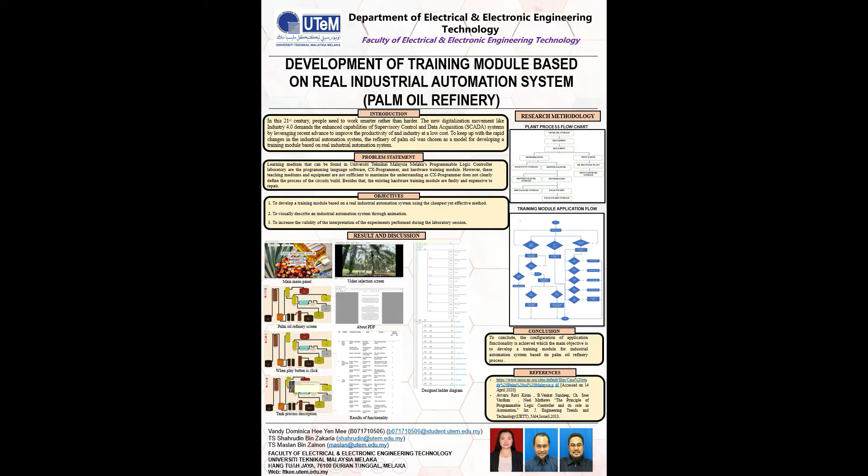According to Olivia McGarry, building courses can be tough to get right. Not only do they have to be educational, but they also have to be manageable for learners to achieve. One of the most effective ways to achieve this is by creating a course made up of training modules. The palm oil refining industries are among the world's leading manufacturing sectors, and palm oil has become an increasingly important vegetable oil in the world market.

Malaysia is currently the world's largest producer and exporter of crude palm oil. To keep up with the rapid changes in industrial automation systems, the palm oil refinery industry was chosen as the model for developing a training module based on a real industrial automation system.

Learning mediums found in University Technical Malaysia Melaka's Programmable Logic Controller Laboratory include programming language software, CX Programmer, and a hardware training module. However, these teaching mediums and equipment are not sufficient to maximize understanding, as CX Programmer does not clearly define the process of the circuits built. Besides that, the existing hardware training modules are faulty and expensive to repair.

Through this training module, a more flexible learning environment will be created for students, lecturers, and instructors. The purpose of this project is to develop a training module based on a real industrial automation system using the cheapest yet effective method. Besides that, the training module is developed to visually describe an industrial automation system.

Most industries nowadays control their plant using SCADA. This training module is believed to give users a surface introduction of what a SCADA may look like. Although this training module only represents the concept of SCADA, consideration has been taken, as it is built in a GUI form where users can control the application.

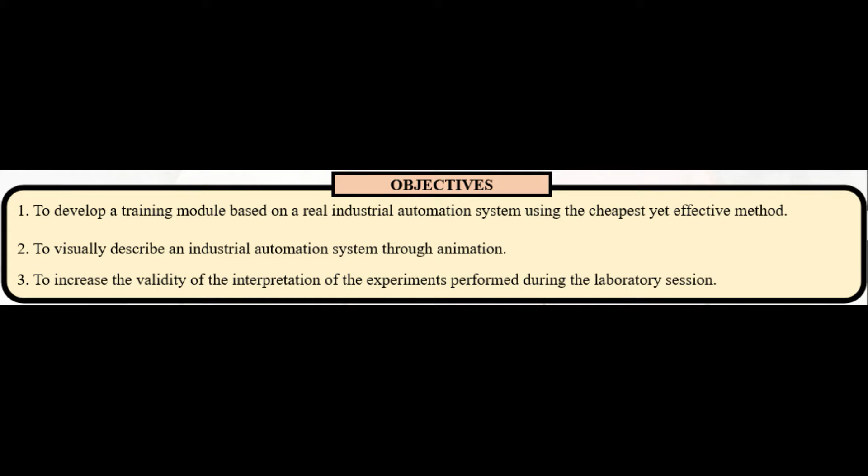Lastly, to increase the validity of the interpretation of experiments performed during laboratory sessions. With the help of this training module, I believe that the complexity of the process and visual aid diagrams will help students improve their critical thinking and problem-solving skills, and become more active in the learning process.

Research methodology: to complete this project, research took place in terms of planning, analyzation, simulation, and discussion processes. The ladder diagram was designed to consist of push buttons and timers as primary parts to ensure the system works corresponding to the industry's process. Visual Studio 2019, on the other hand, was used to build a controllable module consisting of diagrams such as pipes and tanks.

The programming language I used to build this project is Visual Basic, an event-driven programming language primarily used for application development. The designing and developing procedure uses easy drag and drop features. The module is programmed with objects that work with external objects such as images. Furthermore, it responds to mouse and keyboard events.

For example, when a specific action is taken by users, such as double-clicking on a button or image, it also works with text and graphics, allowing work with text effects, fonts, and colors. Visual Basic uses Basic C, C++, and Java programming languages.

The palm oil refinery layout in the training module application and ladder diagram are designed according to the palm oil refinery process flowchart. According to the flow shown, the training module starts when users click on the application, and the main menu panel is displayed along with buttons for palm oil refinery, related videos, and about.

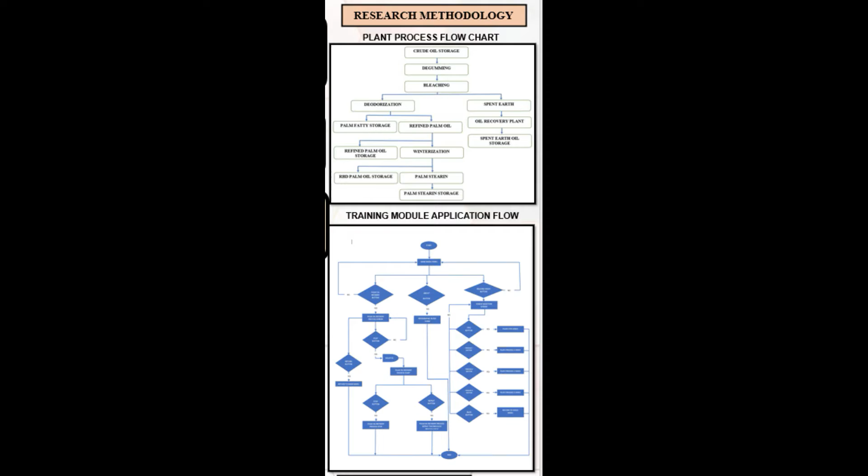Visual Studio 2019 is used to create the training module, and the programming language chosen specifically to build the GUI in a faster and easier way is Visual Basic.

The module is designed according to the process of the palm oil refinery. Some settings are included to make the module work as effectively as possible, such as start-stop control, repeat capability, real-time CX programmer simulation, and pop-up features to display process information upon double-clicking on anything.

This training module also includes video selection to help students understand more about the process, and also infographic explanation about the training module process in PDF form.

The codings are built step by step, starting from the main menu panel, the refinery screen for palm oil, related videos of plant process, and the buttons to the About information.

The control buttons are created through drag and drop features from the toolbox, and the IDE adds button 1 to the flow layout panel automatically. Finally, the code application will be debugged.

The images and videos shown in the application are compiled in a folder that is in the same folder as the application. The folder acts as a library for the application, and when it is called to execute, it displays the specific images or videos chosen by the users.

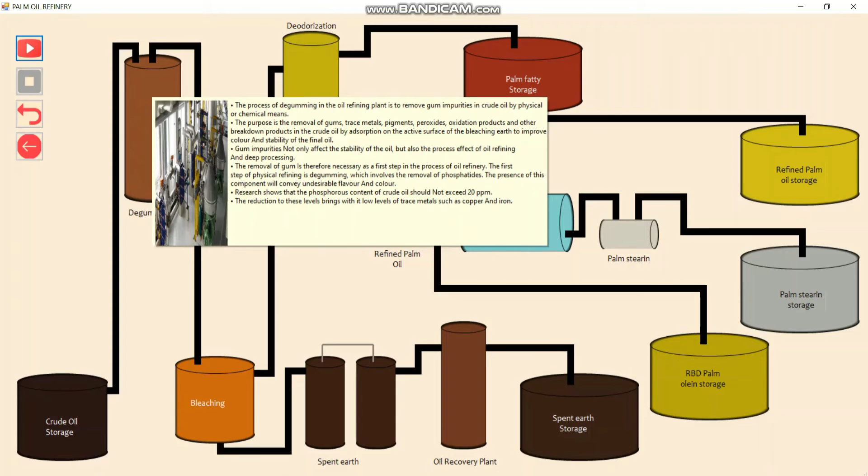Next, to exit the palm oil refinery layout, users just need to click the fourth button, or the last button.

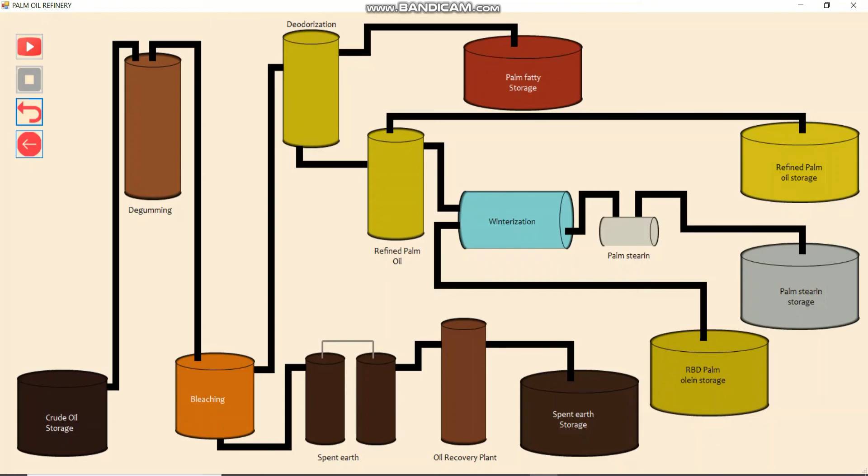Next, the Related Videos button. When the Related Videos button is clicked, the video selection panel will be displayed.

Brought to Southeast Asia from Africa a century ago, oil palms have thrived here. Today, this region generates 85 percent. How is palm oil produced? At the mill, the fresh fruit bunches are processed to separate them into functional components. Bunches arrive at the mill, are checked for quality, and selected into different grades. At the refinery, at the fractionation facility, the oil is separated into fractions.

Users are able to stop, pause, or control the volume of the videos. All of the related videos are obtained from YouTube.

Lastly is the About button. Upon clicking this function, a PDF infographic explanation regarding the training module plant process will be displayed. The PDF consists of 20 pages, including the pop-up information that can be obtained from the palm oil refinery layout.

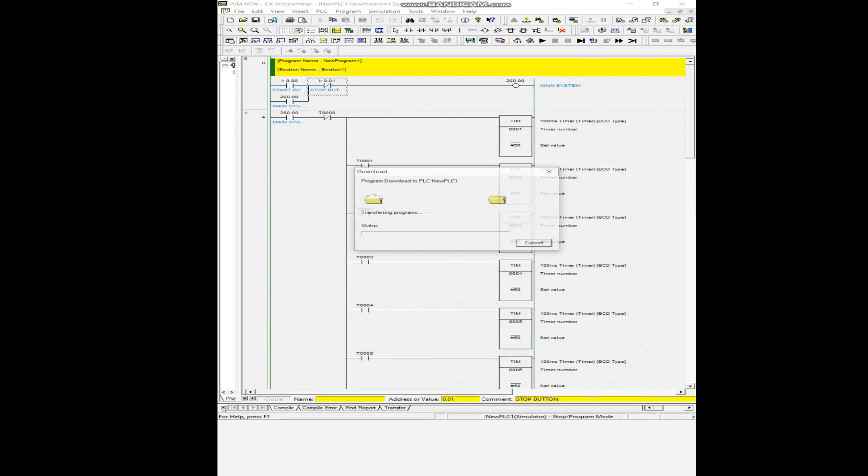Lastly is a simulation of the designed ladder diagram, designed according to the palm oil refinery process. The primary components of the ladder diagram are push buttons and timers.